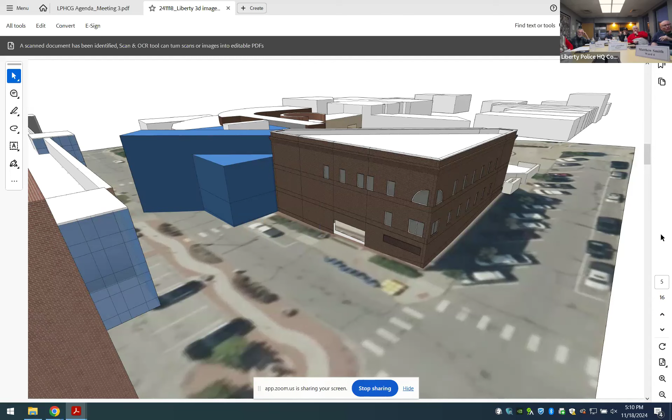So there we go with the white box models. Then we started adding some white box models, which are the next things that you see there. We try to do glass where the glass might go, and you can kind of start to see we're thinking a little bit more about building form.

This is in more detail, we've kind of added because we want people to really like the architecture and not, especially when they're not used to it, get it associated with the brick color they really like, so they choose a design they don't really like but the right color. So we go through it in what we call a white box form to show, you can see from the different sides, everything that's going on there.

One of the key things that could happen, could you back up just a little bit? Just keep right in there, so that one right there. So we got a really nice entrance on the right side of the plan. Maybe back up just one more, sorry about that.

No, you're fine. So one of the things that this police station really lacks is a good front door. Quite frankly, what they've got down here is unassuming. If you drive around there and you're lucky enough to find that parking spot, you walk in there, it's kind of lifeless, and their records unit is upstairs. We're looking at changing all of that and really give them a presence out on one of the main thoroughfares of the city, just like City Hall has.

And in doing so in the expansion, it really helps us. So the police folks were trying to identify something that was a little bit more glassy as an entrance, something that has a lot of natural light in and really gives them a presence downtown. Then that next slide that you've got, there it is. You see that glassy thing in the middle.

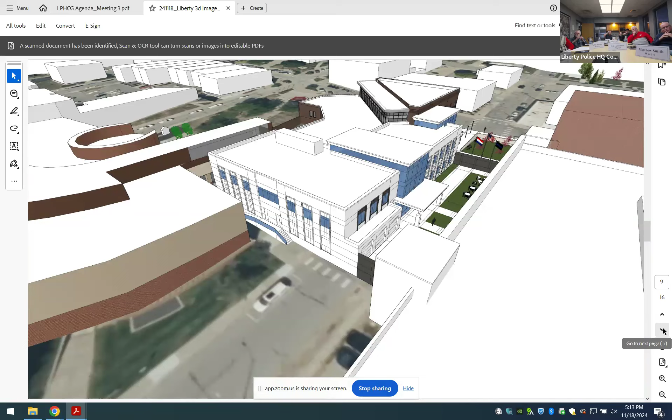Go on to the next one. We did some color studies, and now we're starting to add some materials to it, thinking we may or may not be able to match the existing building perfectly. So we want to make sure we complement it if we don't match it. But you can see what it looks like - it's going to be a beautiful building.

One of the things that happened is we've got this courtyard up in front, and they were thinking about maybe doing an officer memorial there. That courtyard is something that reaches out, since we closed the street - it reaches out and touches the public. Now all the great events you have downtown here can spill over into this plaza.

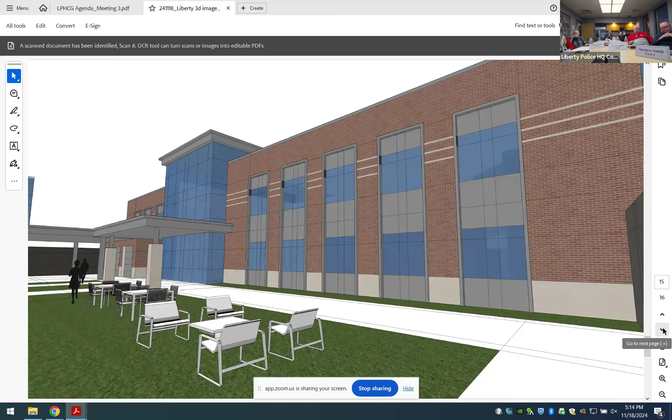And amazingly, the thought is there's going to be a parking garage across the street from where they are at some point in the future. It created kind of a natural courtyard that was private for the police officers to use, either for taking their lunch outside on a nice day if they're working in the building, or maybe even an outdoor workout area. There's a lot of things that can happen out there if they had the space to do it. And those things just came about as the project evolved.

Is that the last slide from them? No, there's your courtyard - that's kind of the back alley going up in between that and the court, or in the county.

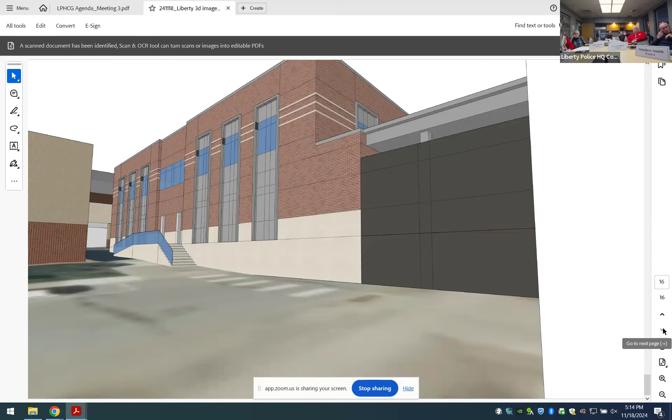That's good, so that's kind of what it looks like on the outside. And again, we just started design, so this is just from last week. Obviously we have lots more feedback we want to get from you all and from the city and the PD as we move forward. That's just a great place to start the conversation with what we put together.

Go ahead, Steve. Did anybody from the community group actually manage to get to the charrette? I don't know if we saw anybody or not show up. We definitely wanted to show the outcome tonight. Okay.

Can you back up to that all white building that shows the officer entry, the city hall, and the main entry, since you got it there? Yeah, or just keep going further - keep going, all white. Yeah, right, next one - back one. Next one - what do we think?

You can see the courtyard in the foreground that's going to have the garage blocking it off from this side. All their covered parking will eventually be in the garage on the lowest level. So there's going to be secure parking in the garage - yes, sir - secure parking in the garage, the lowest level of the garage. Now, the garage has to come.

We wanted to accomplish a couple of things. We know the garage is dependent potentially on a private developer, so that's a TBD thing. But we wanted to make sure that the police station itself stood alone and made sense from a circulation path day one, phase one. And then make sure we're accommodating that garage when it does come, and the opportunity for secure parking within that garage.

So initially, they're parking in the lot where they're parking now, which isn't the best thing for them, but if the parking garage never comes, you can extend the fencing around to make it secure parking. You could, yeah - and we talked about that a little bit. That's a great idea, and we should probably capture that and make sure we got that.

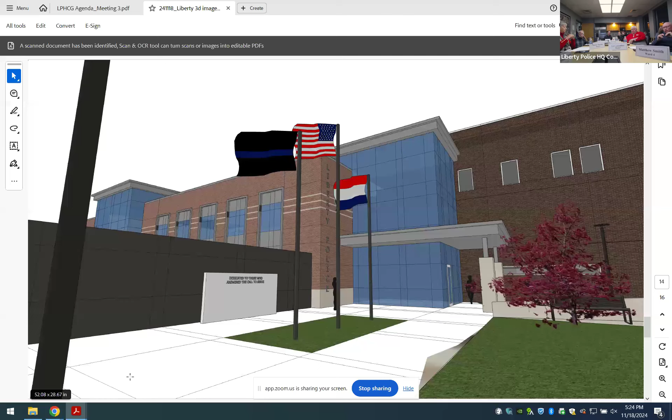Claire, can you go back one? I think it works with... and maybe one more. Festival, they're going to just have to figure it out. Keep going. Right there, it will. So that space, you could still have some fall festival events occur, even in that space that's left over. There's a lot of land there.

Let me ask this directly. You all have identified that you want whatever happens to this facility to be welcoming to the public, but equally important to you is that it's welcoming for the police staff. Does this look something along the lines of welcoming to the community? Right, absolutely. Sure.

Captain, does this make you feel proud to want to walk through those doors, or does it make you feel welcome to be serving this community? Yeah, once you see the interior layout later on, you'll see how that's welcoming to officers and staff coming in another entrance. And the front courtyard is great for hosting community events.

As a community group, you recognized the value of recruiting and retention of the police force. Do you feel this design, this expansion, would help attract people to want to come work at this police department? A lot more than what we currently have.

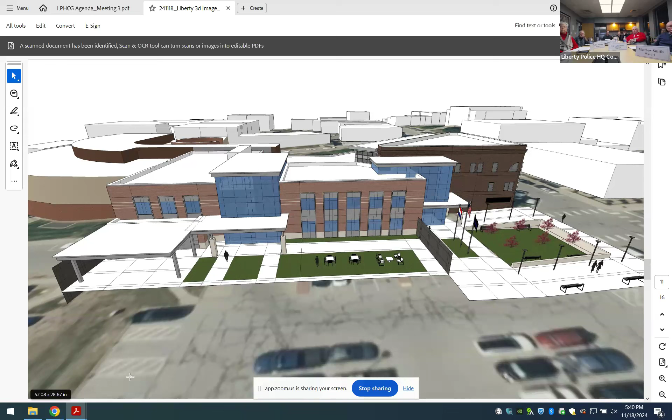How about something that complements it, if you can? Complementary is the word I was looking for. Could you go so complementary brick... to the one that shows the plaza front a little bit there? Yeah, that one right there. See if you know how to spell it. COMP period is what he's writing down.

So that public entry does a nice job of separating the existing city hall brick and this new brick. So we do have an opportunity to make them complementary without having to have them touch. Yeah, they don't touch. That's a good point.

Where would the public parking be? In that existing parking lot, or the parking garage someday, or on the street. Or on the street. In convenient street.

You can see down there, up in the upper left-hand corner, there's a little blue glass peeking out of the parking garage. That's right in the center of the block. We're thinking all the public that comes to use the county building will probably come down there. It's just past the edge of our sally port, so it's outside the police secure area, but it's going to give them a good link so that they feel comfortable going in and out. If you're on a jury or something, you want to have a pretty quick path back and forth. So in theory, one stair tower would be for police or courts entry, and the other stair tower would be for the county.

Do you want to move on to the interior? Sure. Okay.